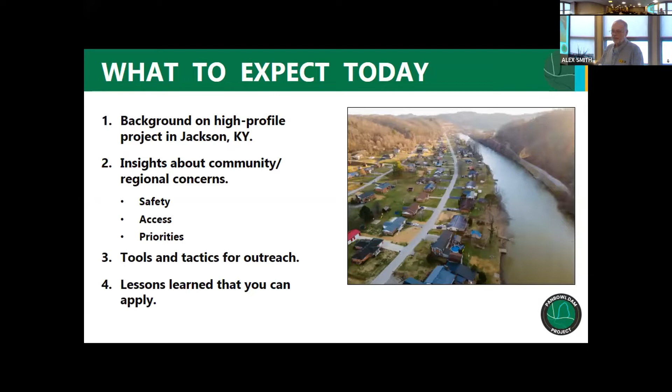Patty's already introduced us. I'm HB, he's Ed. I'm going to go first, and then Ed's going to pick up and talk about C2's involvement in this. We had to enlist them when we got to do two things at once here, click the slide and everything.

We're talking about Panbowl Lake, and I thought this was interesting. My wife found an old picture in a thrift shop up in Ohio several years ago, and then she looked at it and saw that it was the Panbowl in Jackson. So she bought the picture and it's been in my office ever since, with no way of knowing this would become such a big controversial thing. The Panbowl was a huge bend in the North Fork of the Kentucky River, about 7 miles around, and I think it was like 50 or 60 feet on either side. You can see in this old picture there was a railroad that ran across that, and that's all different now.

Talking about the background of the flood, in February of 2021 we had a huge rainfall event. Jackson experienced significant rainfall, including in the Panbowl Lake watershed and the North Fork of the Kentucky River. The other two forks of the Kentucky River also got a lot of water. Beattyville, my hometown, had Main Street inundated.

There were only a couple of businesses that water did not get into. And Irvine, the next town downstream in Estill County, where I worked for years as a newspaper editor, was completely cut off. There was no way to get in or out of Irvine. A strip mall built on a fill on the west side of Irvine had its buildings flooded and inundated, and I don't think anybody ever thought that could happen.

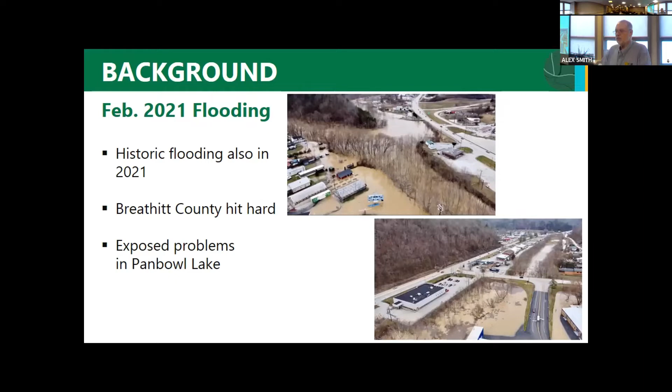The February 2021 flood was the 10th highest flood ever recorded in Breathitt County, but there were quite a few things that caused the residents to be concerned about that. We were preparing this presentation based on the response to the 2021 flooding.

Then just a few weeks ago, we had an absolute total disaster in Breathitt and Perry counties, and then in Knott, Letcher, parts of Clay, parts of Pike County. On the night of July 27th, we had devastating flash flooding. The North Fork of the Kentucky River crested at 43 feet in Jackson, the highest crest ever recorded—more than 43 feet.

Panbowl Lake didn't flood because that watershed didn't get as much rain as what happened back in February of '21. But we had issues back in the first flooding incident with water seeping through the embankment, through the dam, which caused a lot of concern because the lake was so high from all the flooding.

So we called in the Division of Water, since that is considered to be a dam, for their assistance and advice. And they recommended that we close Kentucky 15 going through Jackson for about 36 hours.

If you're familiar with Southeastern Kentucky, Kentucky 15 is the major north-south thoroughfare in that part of the state. It connects the Mountain Parkway at Campton, runs through Jackson and Hazard, down to Whitesburg to US 119 and US 23. It's a major corridor linking that part of Kentucky to the bluegrass section of the state. So you can imagine what closing that road did for commerce and emergency response in the areas hit by the flash flooding.

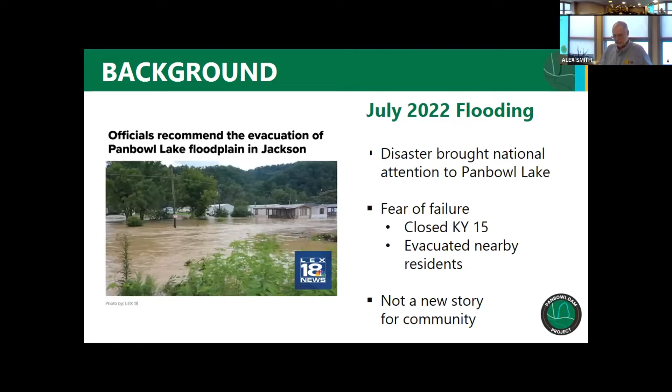Oh, I hit the wrong button.

If you're familiar with the Mountain Parkway, it runs 4 lanes to Campton, and then, until recently when construction started, 2 lanes on to Salyersville and then to Prestonsburg. Kentucky 15 is mostly 2 lanes from Campton through Jackson and Hazard to Whitesburg, but it's been 4 lanes since then.

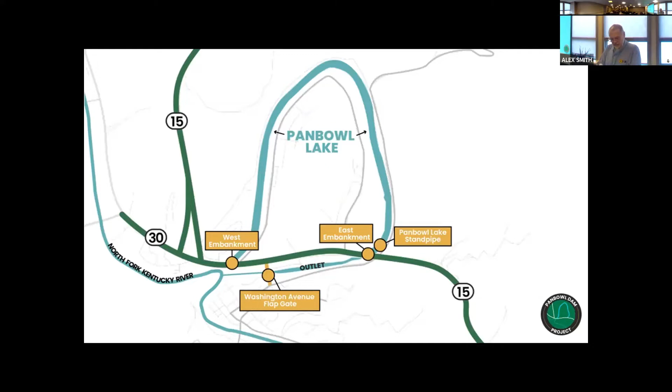This was the issue we had in February of 2021 that caused so much concern. Because the Panbowl watershed got so much rainfall, the lake level got really high, and the river was up with the current flowing very fast. There was fear of the river overtopping the dam.

The river crested on March 1st of 2021 at 39 feet—4 feet short of the record we had this July. The lake was about 736 feet above sea level.

We had a small pop-out slide happen and water seeping from the river because it was so high and flowing so fast.

When the water was seen seeping through the dam, that caused the residents of the lakeside section of Jackson and the people in that watershed a lot of concern, especially because the lake was so high from all the flooding.

Emergency management personnel in Breathitt County ordered the evacuation of all residents of the Lakeside Estates section of Jackson. The hospital, located in the lake watershed, was evacuated. The local nursing home, also located there, was evacuated as well.

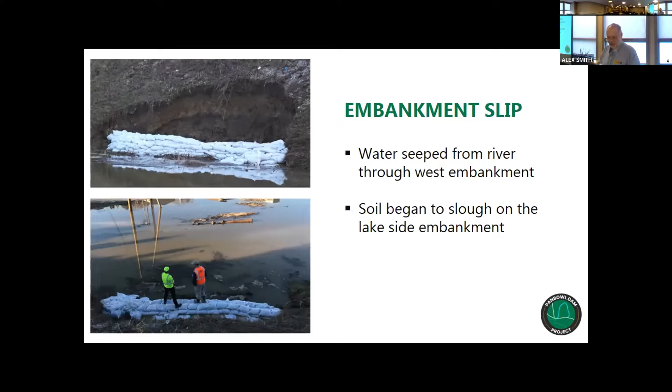The dam held—there weren't any issues, and water never got over top of it. Then the river fell quickly, but this made headlines and we had a whole lot of people come take a look at it.

State Representative Bill Wesley was there, pictured with Corbett Caldwell, chief district engineer. Hal Rogers also came to check it out along with several members of his staff. This became a statewide priority because of the dam safety issues and because that dam carries Kentucky 15, such a vital artery for Eastern Kentucky.

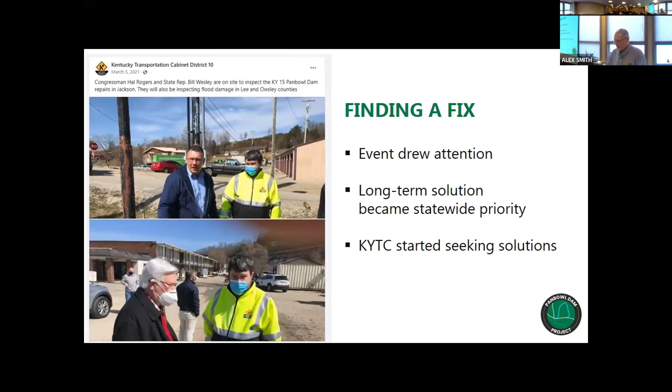So we got started on public information involvement, trying to let the public know what was going on, in addition to starting plans to repair this.

We had a lot of misinformation, which seems to be the case with everything these days. Somebody kept posting on District 10's Facebook page that the dam had breached, and it had not. That raised a lot of panic, and people were scared to death that the dam had failed. It hadn't, it held. We just had some water seeping through the highway fill portion of the embankment, but the dam did not fail, and the seepage did not really cause any issues with the lake level.

We already had a project under development to widen Kentucky 15 to four lanes, which would double the size of the dam. But in response to this 2021 flooding, we initiated an H&H study, a hydrologic and hydraulic study, and an engineering study of the Kentucky 15 embankments and that Washington Avenue, Kentucky 1812 embankment that has the flap gates.

We made some repairs to the flap gates and put a new debris gate over top of the outlet channel. That was fabricated at our Breathitt County maintenance shop. Our guys did that, and they installed it to keep debris out of that drainage.

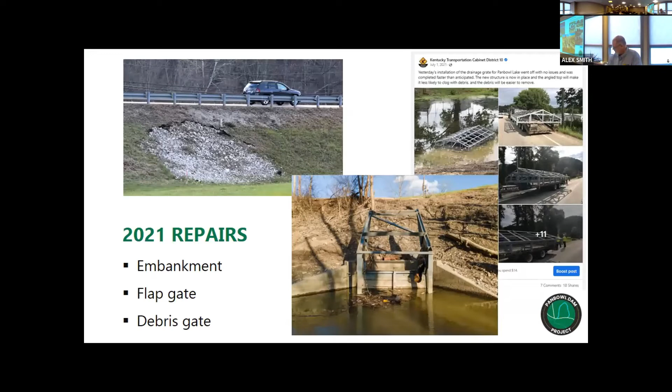And we set up a web page. I think I've gone too far here. We got a slide missing, that's what's going on here. But we did set up a web page for people to get information and sign up for the public meeting.

Of course, in the meantime, anytime we had heavy rain in the forecast, people were just absolutely scared to death. We had one time where the National Weather Service office in Jackson was predicting, it didn't come to pass thankfully, once in July of 2021 that we could get a major rise on the river.

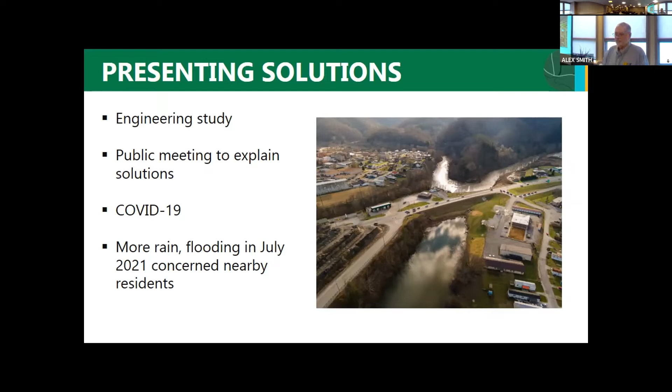And we stationed personnel from Breathitt County Maintenance at the dam overnight to monitor the situation so they could take action if something happened. But we did not get the rain that was forecast, and that kind of ended up being a false alarm. We were glad of that.

So we had planned to do the public meeting, but the COVID outbreak in the area made us look at other options, and we did the virtual public meeting. We didn't have any experience in doing a virtual public meeting to present information and take questions.

So that's when we turned to C2. We knew that they had done some of this work in other districts, and they had the expertise in doing this. They could develop the meeting protocol, set everything up, and conduct the meeting for us. So we turned to them and asked for their help under the statewide communications contract that KYTC has with them. And they were more than glad to help, and they set everything up for us. We were really, really grateful for their assistance.

So that's why I'm going to have Ed come up now and talk about what C2's role was in this, and what they did to facilitate our meeting and the communication efforts.

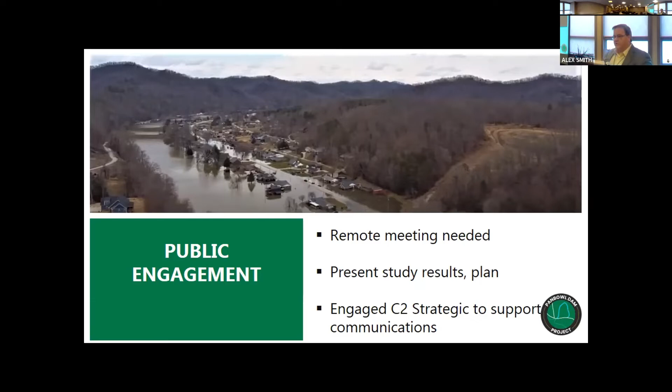So what they brought us in on was to basically be a resource for the district to help them out in a number of ways. I think when we came in, it was either late November or December of 2021 when they brought us in to engage us in this, and we had the meeting in January of 2022. So we wanted to put on this public meeting.

As HB said, fortunately or unfortunately, we had gained a lot of experience through COVID in putting on virtual public meetings. You saw in the picture that when they came to visit the dam, they were wearing masks. There had been heightened COVID in the area, and there was a need for us to do that online rather than in person, or at least try not to generate large crowds.

So that's what they ideally brought us in for, but also to help bring some of those other resources that HB and the district wanted to use to tell that story. That's really what we needed to do - frame the story of what was the issue the community was experiencing, but also what were the solutions they were already developing to deal with that issue.

So here on the screen, it talks about some of the things we utilized to tell that story - the branding graphics, and I'll get into that a bit more. We helped promote the public meeting. We also helped put together materials to simplify and really explain what was going on there, and how we were dealing with it in a way the public would understand, in a way community leaders would understand, so eventually they feel comfortable in their homes.

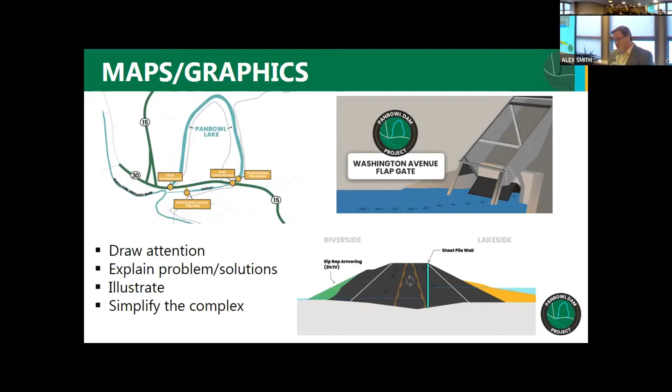There's a lot more graphics involved in this. Some were motion graphics to get attention. They're not as easy to illustrate here, but we incorporate those in the video to show how some of this infrastructure works. So that's one component, and again, that's something we were able to bring through the statewide contract, where we have tools and resources that the district didn't have access to.

The online public meeting was at the heart of our engagement, what they wanted from us. This was the ability to coordinate the meeting, promote it, pull together all the materials needed to make it successful, and then archive it so that the community that did not participate in the initial meeting was able to see it. So we did the meeting, recorded it, put it on video and audio scripts, uploaded those to the website so that anybody who wasn't able to participate saw exactly what was said and heard the questions that were answered during the virtual public meeting.

One of the ways we promoted that, we did a couple of different things. We obviously used what HB does all the time, an important part of the public information process. We use the media. We promoted this, put information out in advance to let people know the public meeting was coming, where it would be. We did the traditional advertising that we do for every public information meeting or hearing.

We put it out on social media, so HB utilized the channels. HB is one of the leaders across KYTC in the use of social media. He's been active in it for a long time and has gained a large following. So a lot of people in the district trying to get information about public meetings and what's going on with their infrastructure are looking to HB to provide that. So we put together snazzier graphics than what they'd normally have access to, really highlighting the public meeting. We followed the brand again for that attention-getting aspect, and promoted it over and over to make sure people were aware it was there and invited to come ask questions.

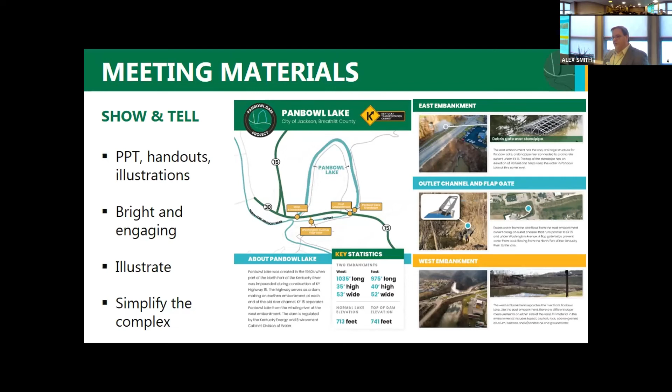Panbowl Lake is a geographic feature in Breathitt County that is part of what makes the city of Jackson unique. The area around the man-made lake includes a neighborhood, hospital, school, businesses, and the Kentucky Transportation Cabinet's District 10 office. Panbowl Lake used to be part of the North Fork of the Kentucky River, but that changed in the 1960s with the construction of Kentucky Highway 15. When the road was built, the lake was impounded through a series of three embankments that served as dams, two of them on Kentucky 15, one of them on Washington Avenue.

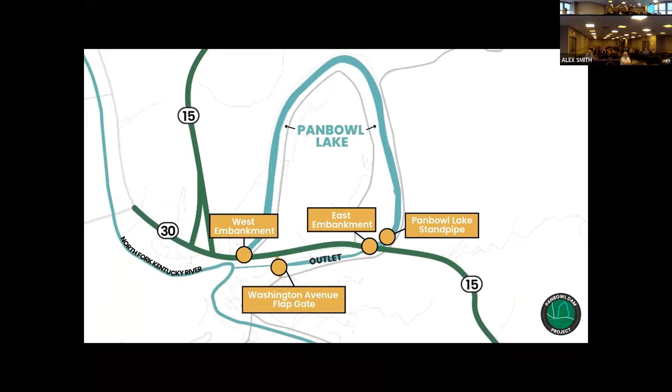The highway separates Panbowl from the river at the west embankment. There is a spillway riser near the east embankment, which leads to an outlet water channel that runs parallel to Kentucky 15 and under Washington Avenue by way of a culvert and flap gate. The outlet is necessary when water levels on the lake go above a normal elevation of 713 feet.

There's a vertical pipe that connects to a horizontal concrete box culvert that runs underneath Kentucky 15 and channels the water into the old riverbed channel between Kentucky 15 and Main Street, then through the gate system, Washington Avenue, and into the main channel of the Kentucky River North Fork as it exists now.

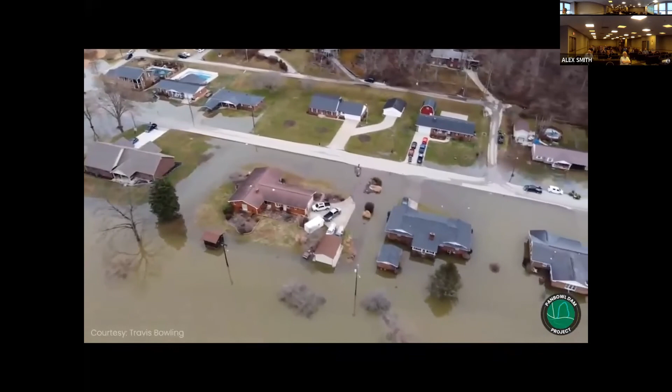In late February 2021, extensive rainfall caused historic flooding in eastern Kentucky. The North Fork of the Kentucky River crested at just over 39 feet in Jackson, the 10th worst flood in recorded history for this community. Jackson had not experienced flooding this severe since 1984.

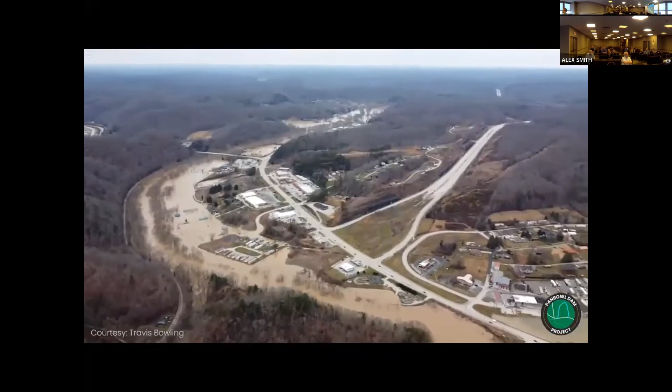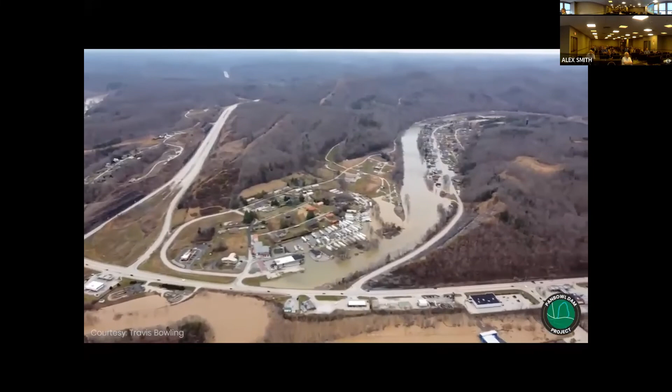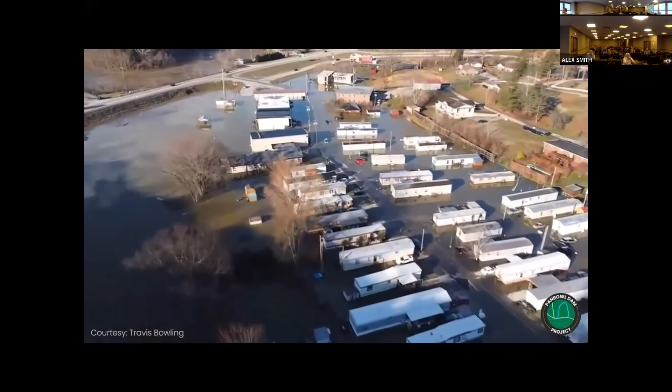Not only was the river level high, Panbowl Lake reached an elevation of nearly 729 feet, about 16 feet above normal. Water from the river began seeping through the west embankment, causing a stability issue for the slope. It appeared that maybe some water was flowing back from the river into the lake, because you had the rushing floodwaters from the river trying to make that bend there where the cut through had been done against the embankment.

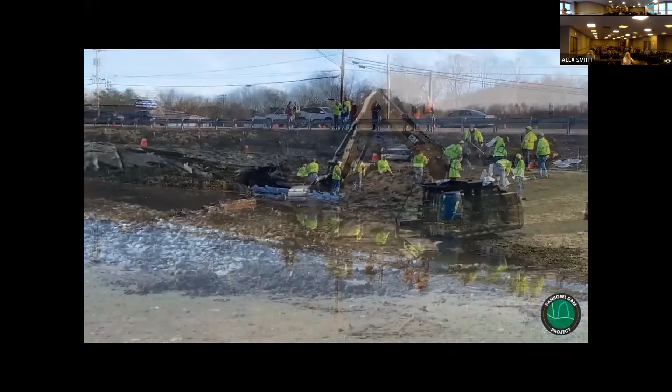Kentucky Transportation Cabinet personnel responded quickly to the west embankment slip, placing sandbags and later geotextile fabric and rock to prevent further erosion. Ultimately, the dam did not breach and Kentucky 15 remained open to traffic.

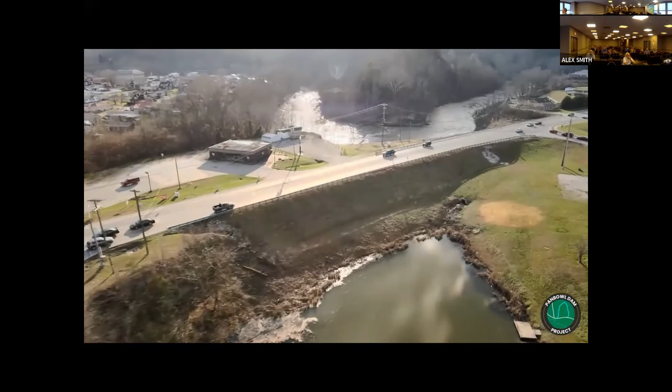Since that historic flooding event, KYTC initiated an engineering study to evaluate the condition of the embankments and identify possible improvements. There is also a plan to widen both Kentucky 15 and Washington Avenue, so the engineering report will be used to help inform the design of that project.

What we've tried to do is look at some short-term solutions that can be incorporated into the longer-term permanent widening project that will hopefully be coming along in a few years.

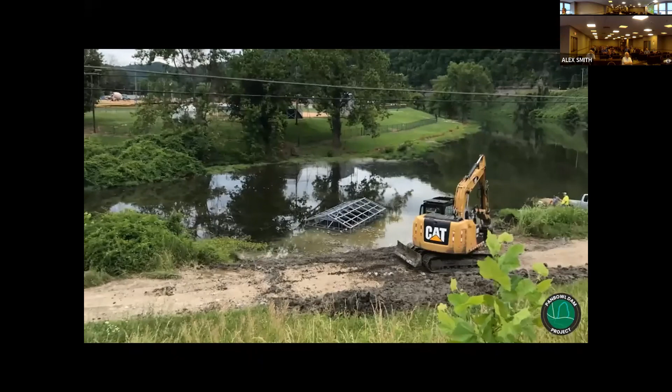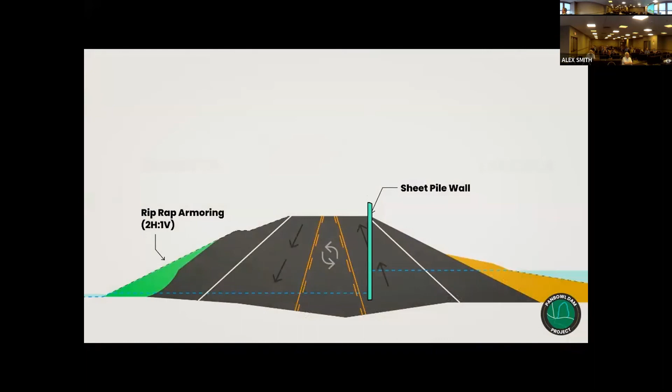KYTC has already replaced the debris gate over the east embankment riser and cleared out vegetation as recommended by the study. With available funding, the next improvement will be a driven sheet pile wall installed at the west embankment to create a more impervious cutoff from the river.

Panbowl Lake remains a floodplain, but these improvements will help prevent future lakeside flooding and maintain the structural integrity of the Kentucky 15 dam.

One thing we want to do here is ensure not only the safety of the residents that live along the lake, but we have to ensure that Kentucky 15 remains a viable highway. It's a major artery from southeast Kentucky to central Kentucky.

Before we jump into questions, I'm going to let Ed give you a brief update. We got some positive news recently about this project.

Like I said a little earlier, we had planned this presentation before the flooding that we had in July, and then last month, and our recovery efforts are still ongoing.

It was a bit ironic. The day of the flooding, we advertised for bids on that dam stabilization project. I know it was referred to as a sheet pile wall, but that may not be what they do. They're calling it, I forget the exact term, a cutoff wall, I think. But the day we had the flooding, they had advertised for bids on that, and the bids were opened on August 18th. It was very apparent that we would have a winning bid. We had two bids, and one was beneath the estimate, and one was significantly higher than the estimate. So it looked like we were going to have a winning bid.

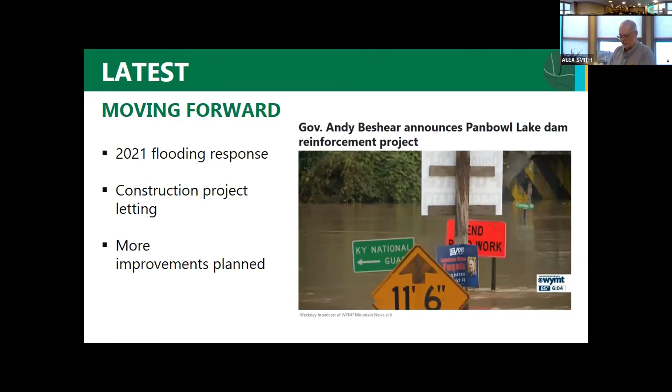And now, if anybody has any questions—Patty says we've got 2 minutes. I don't have any. Okay, our project manager is here, so we're going to deflect any questions that Ed or I can't answer to Eric.